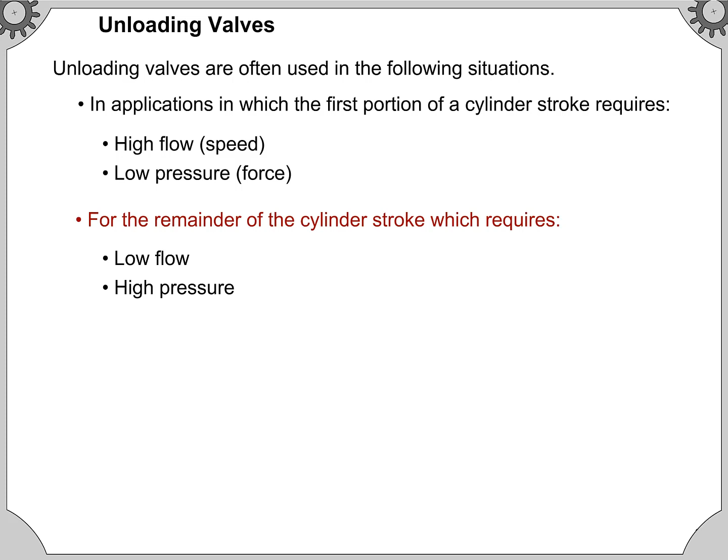Unloading valves are often used in the following situations. In applications where the first portion of a cylinder stroke requires high flow and low pressure, for the remainder of the cylinder stroke, which requires low flow and high pressure.

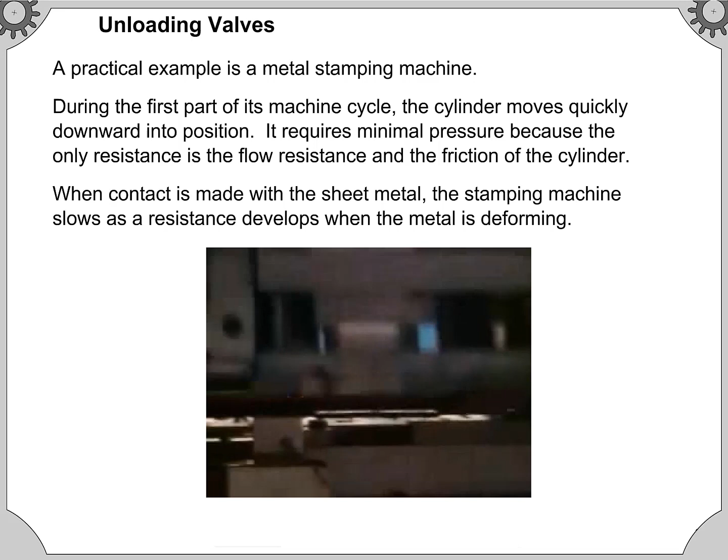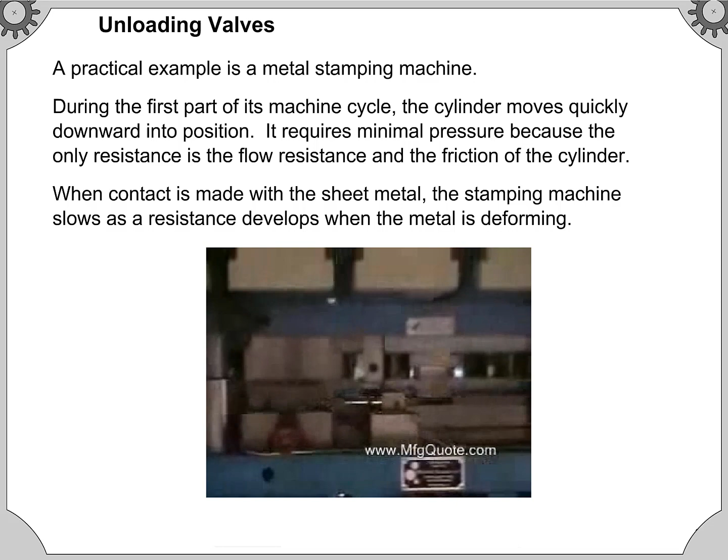A practical example is a metal stamping machine. During the first part of its machine cycle, the cylinder moves quickly downward into position. It requires minimal pressure because the only resistance is the flow resistance and the friction of the cylinder. When contact is made with the sheet metal, the stamping machine slows as a resistance develops when the metal is deforming.

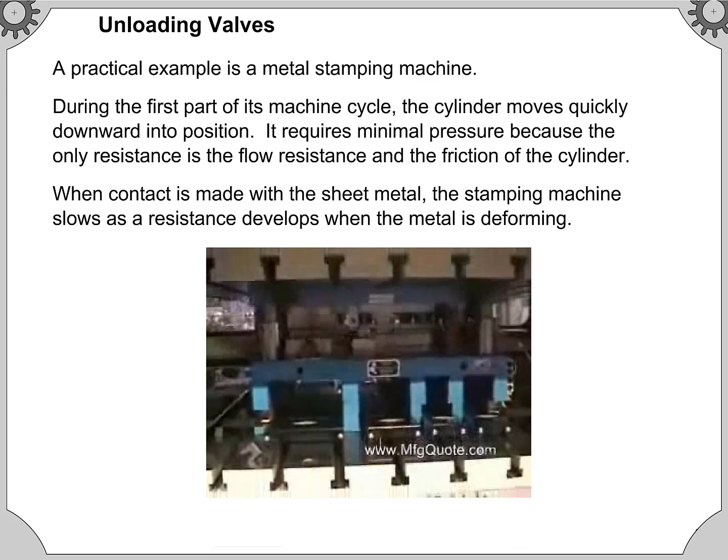Unloading valves are similar to pressure relief valves. Their symbols are shown at the right. Both types of valves send fluid back to a tank when a preset pressure is reached. However, unlike a pressure relief valve, which is activated using pressure from its own line, the unloading valve dumps the fluid when the fluid from an external line reaches a certain pressure.

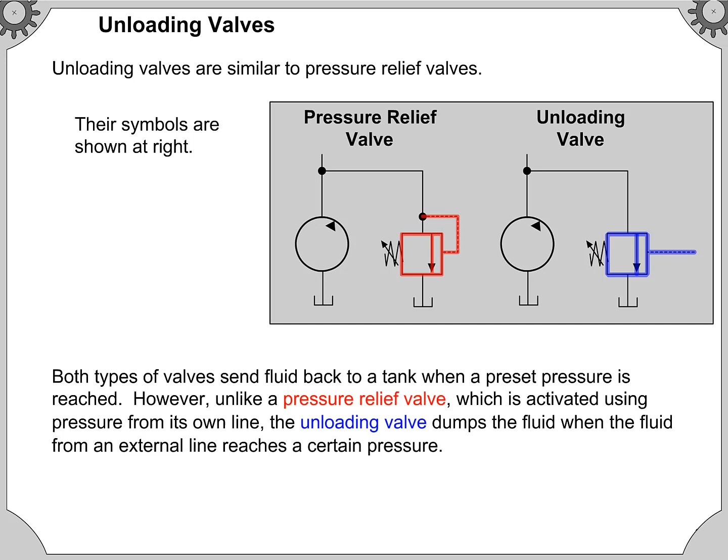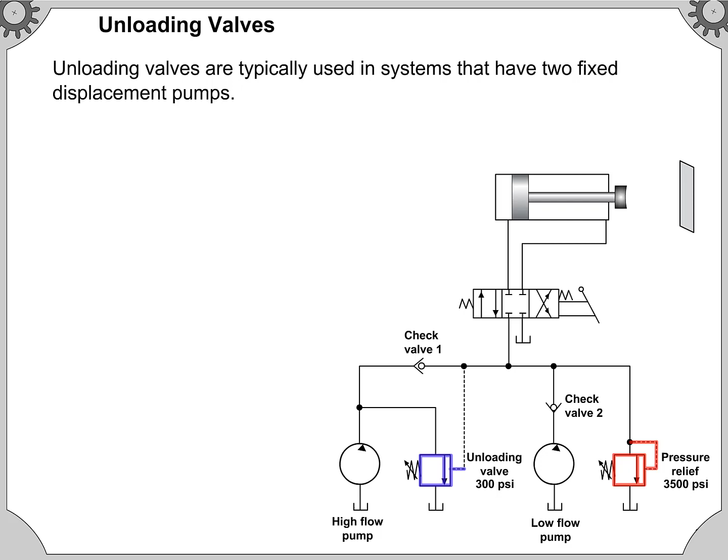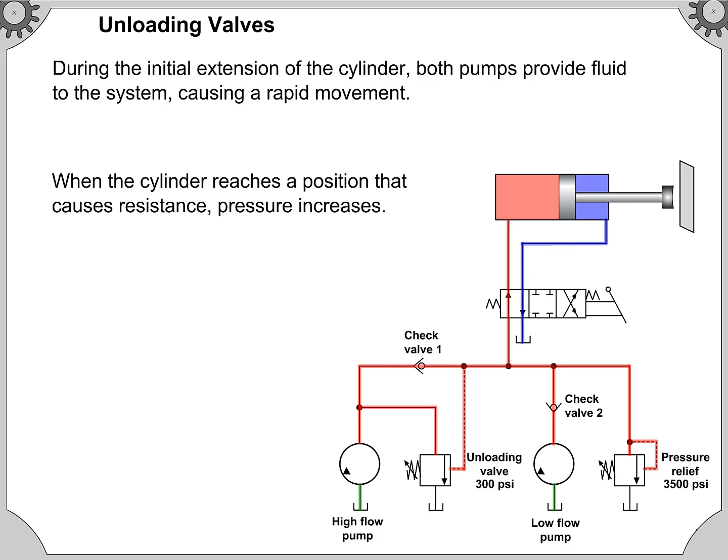Unloading valves are typically used in systems that have two fixed displacement pumps. There are two functions of the unloading valve: protect the prime mover and save energy. During the initial extension of the cylinder, both pumps provide fluid to the system, causing a rapid movement. When the cylinder reaches a position that causes resistance, pressure increases.

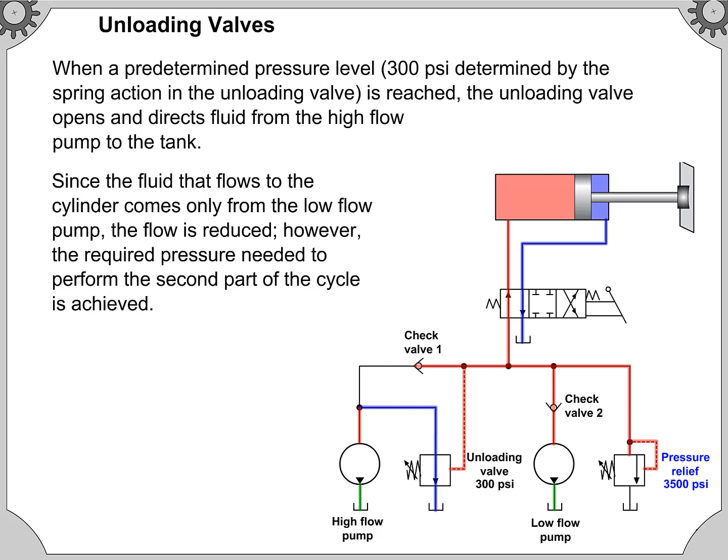When a predetermined pressure level is reached, the unloading valve opens and directs fluid from the high flow pump to the tank. Since the fluid that flows to the cylinder comes only from the low flow pump, the flow is reduced. However, the required pressure needed to perform the second part of the cycle is achieved.

When the cylinder reaches full extension, a back pressure develops. The relief valve opens and directs fluid from the low flow pump to the tank when 3,500 pounds per square inch is reached.

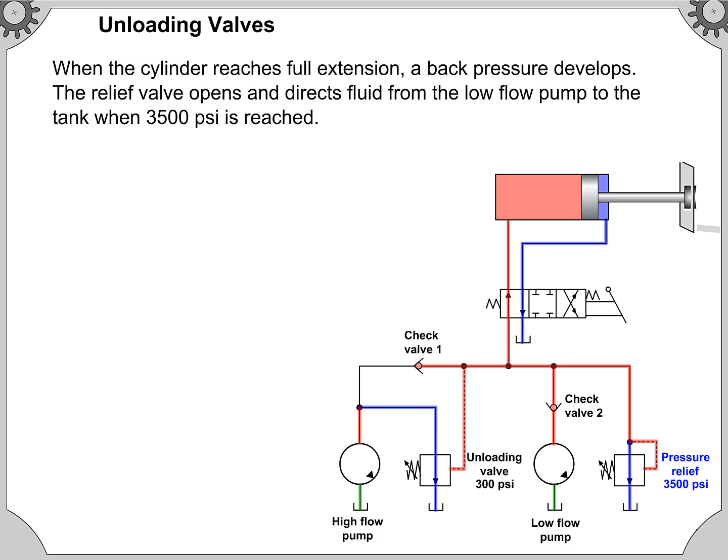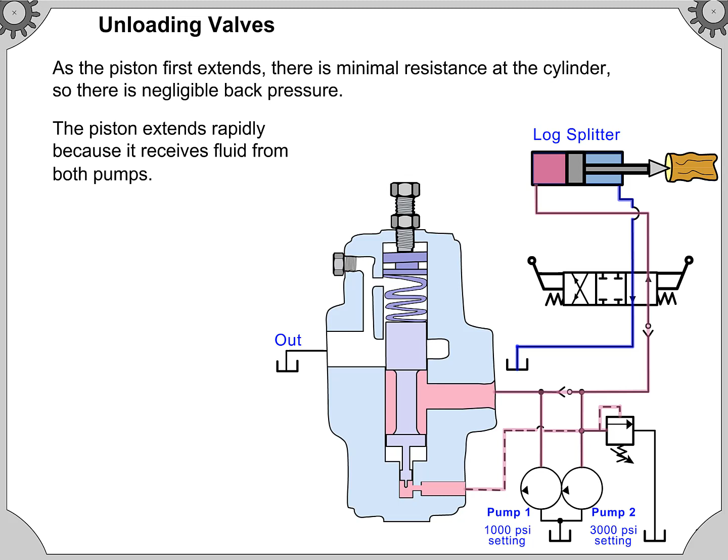Here is a diagram of the unloading valve. As the piston first extends, there is minimal resistance at the cylinder, so there is negligible back pressure. The piston extends rapidly because it receives fluid from both pumps. When the piston encounters resistance, a back pressure forms.

When the pressure becomes high enough to overcome the spring setting of 1,000 pounds per square inch, flow goes from pump 1 to the tank. A check valve prevents the fluid from pump 2 flowing into the tank. Instead, the fluid is directed to the cylinder.

Since the fluid that goes into the cylinder is now being pumped by one pump instead of two, the rod extension slows down. When the piston rod reaches the full extension, the back pressure increases to 3,000 pounds per square inch and activates the pressure relief valve so that the fluid from pump 2 goes to the tank.

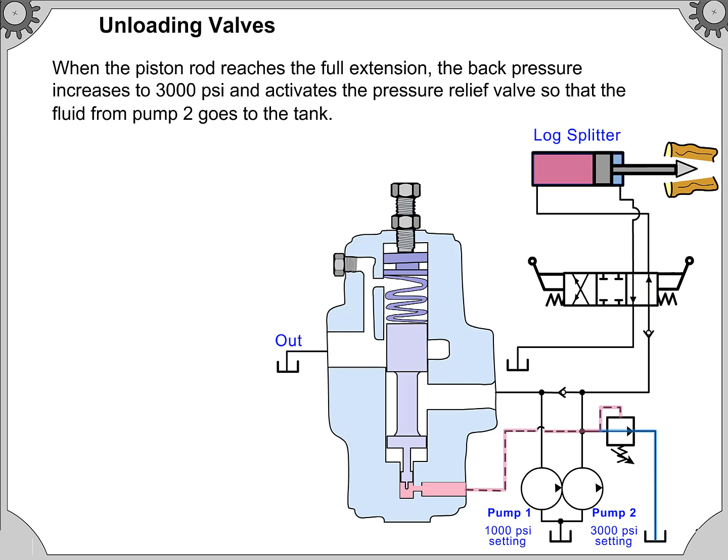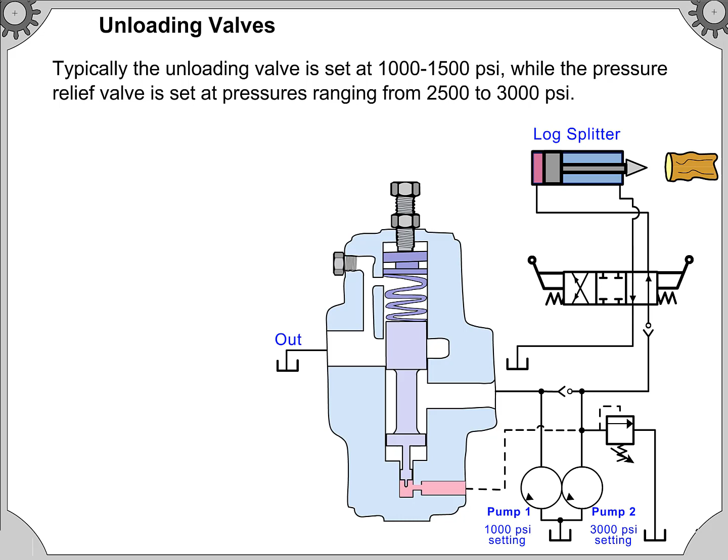Typically, the unloading valve is set at 1,000 to 1,500 pounds per square inch, while the pressure relief valve is set at pressures ranging from 2,500 to 3,000 pounds per square inch.